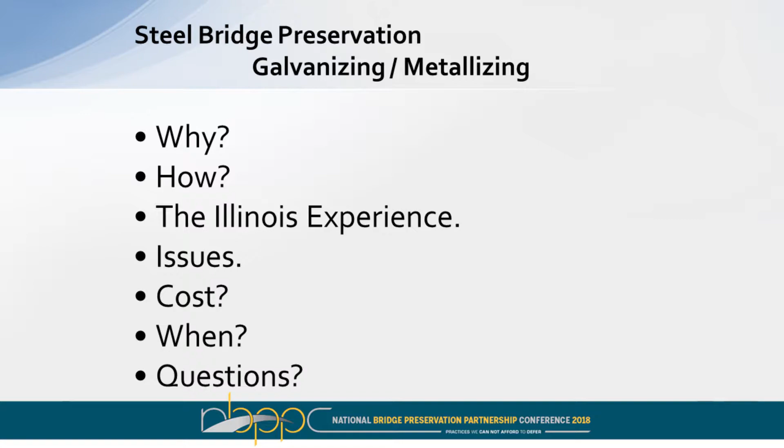We're going to talk about steel bridge preservation, which is near and dear to all of our hearts. A brief outline: why should we care about bridge preservation? I realize this is probably preaching to the choir, but we need to think about how to sell it, because when we want to do something different and spend a little more money, we need to sell it to people who don't see what we see. We need to think about how to preserve our steel bridges, what we've done in the past, and what we should do in the future. Ideally I'd like to move all our bridges to the Arizona desert, because it looks like paint lasts forever there, but that's not quite possible. We're going to talk about the Illinois experience, cover some issues, go over the costs, talk about when we should do this work and make this change, and then go over any questions you have.

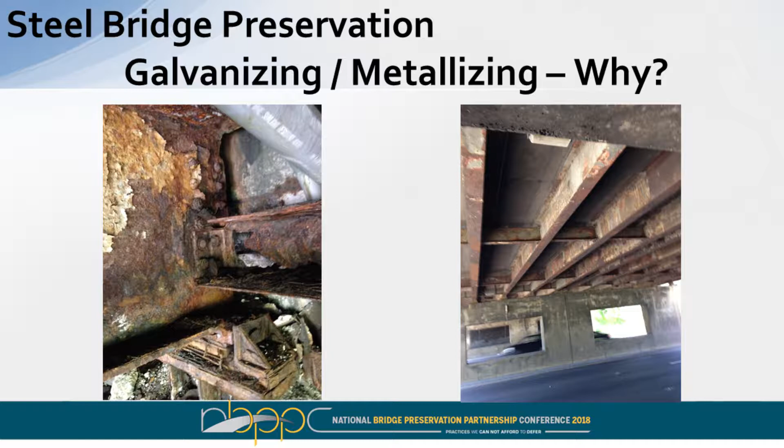I think these pictures are pretty evident. Why should we preserve steel? Why should we consider different steel preservation methods? Because what we're doing isn't working - either we're not spending enough money on painting, or we need something different, something more robust. Painting isn't doing it for us. We also have a huge inventory of steel bridges out there - 30% of the nation's bridges are steel, and I'd venture to say they're the longer bridges, so the deck area of steel bridges is huge.

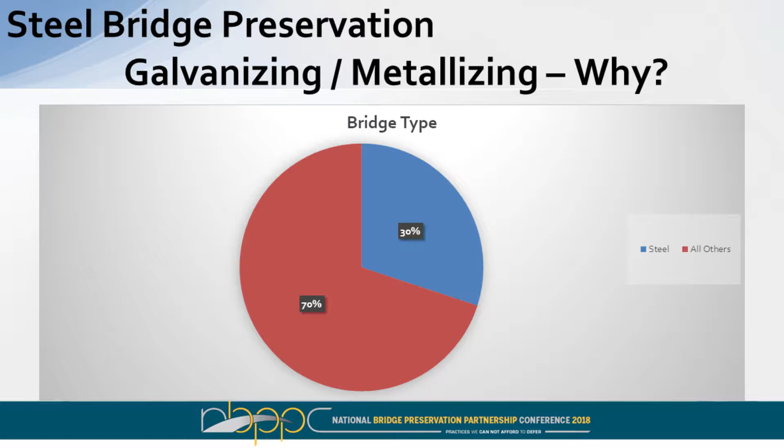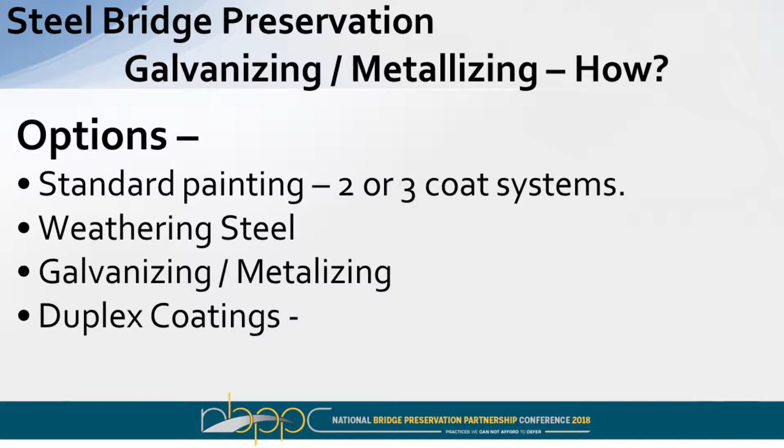So what are our options for preserving steel bridges? Our standard in Illinois has been painting - we'll do a 2 or 3 coat painting system and declare victory, but our victory doesn't last very long. Weathering steel is an option; it was sold to us as a good answer, but it hasn't always worked well everywhere, so we need to be careful where we use it. Another option we've used more in the last 10 to 15 years is galvanizing and metallizing, and there's even a possibility of duplex coatings in the future.

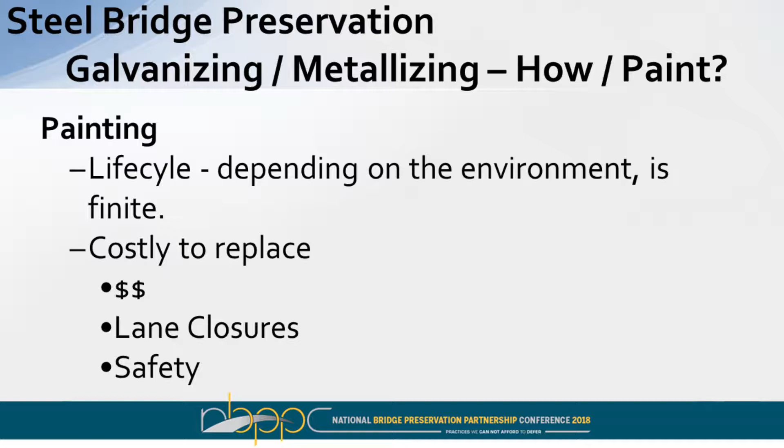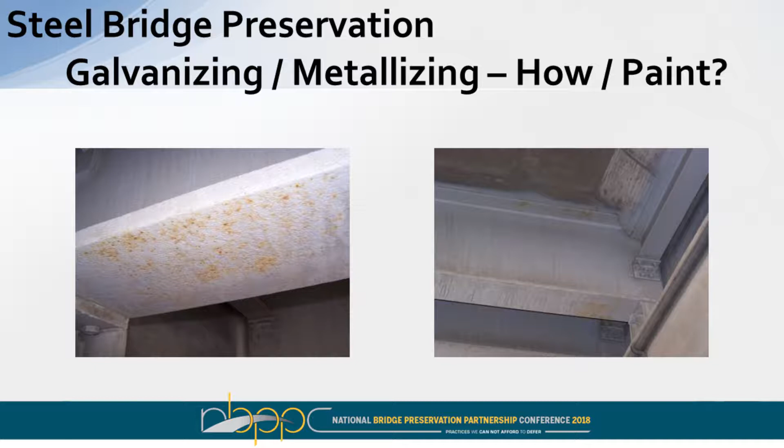Painting - what are some of our issues with it? It's really got a life cycle, and that life cycle is not the life cycle of the bridge. It's definitely finite and costly to replace. It's more costly than just the money up front - you've also got lane closures, traffic delays, and the safety of the workers who have to be out there replacing that painting. We've had painters die in Illinois, and I'm sure every other state has had the same experience. This is a redecking, and two years after we redecked it, we did a full blast clean and paint. Two years later, I've already got flash rusting showing up. Painting's not a permanent solution - you've got to keep coming back.

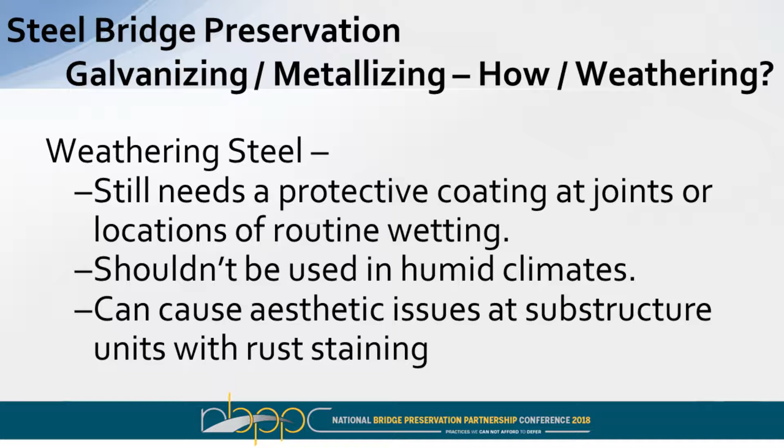Weathering steel provides a protective patina that's supposed to prevent future rusting, but it doesn't always work - you've got to be careful. It still needs a protective coating at bridge joints or locations like bridge drains that see routine wetting. It shouldn't be used in humid climates, and it can cause aesthetic issues. Personally, I think it looks kind of neat with the rust bleeding down the piers, but not everyone agrees with my particular tastes.

One of the options we've looked at is hot dip galvanizing. It's not a paint coating it's a zinc coating, it's actually a coating formed differently. So we're going to have Tim talk about hot dip galvanizing and metallizing.

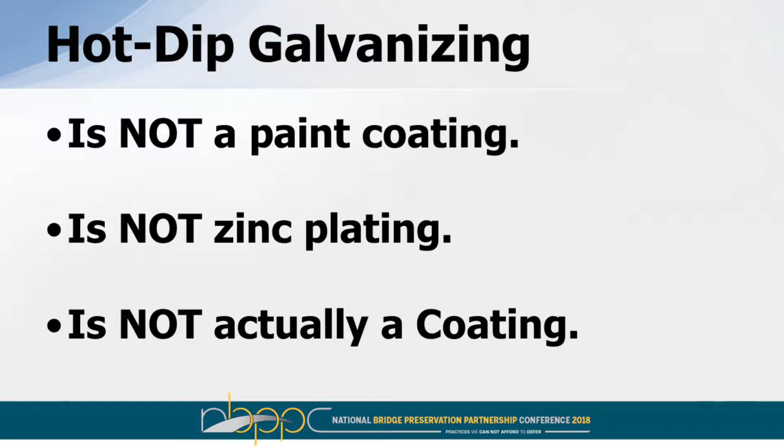Thanks, Sarah. So when we talk about hot dip galvanizing, it's not paint, it's not plating - technically it really is not a coating, we're actually forming a new alloy. So how does that work? It's a thermo-zinc chemical diffusion reaction that happens between molten zinc and steel. For lack of a better term, we're actually melting the two metals together to create a new alloy that's going to protect the steel for a longer period of time. So how does that happen? Well, galvanizing is a factory-controlled process done on a repeatable basis, and you really can't fake it if you get to the end of the line and it hasn't worked.

We know it pretty quickly and have to send it back through if that does happen. But how does that happen? Well, this is the process in a typical hot dip galvanizing plant.

We have a degreasing system that happens initially where the steel is dipped just to remove grime, dirt, cutting fluids, things of that nature that have happened in production or shipping to the galvanizing facility. We then rinse that, and it then goes into a pickling process. This can be either a hydrochloric acid solution or a sulfuric acid solution. It's about 50-50 in the United States, and it's basically the preference of the galvanizer.

Sulfuric lets you go a little bit quicker, but it's more aggressive, so you've got to be careful and have a good operator. Hydrochloric, while it doesn't go as fast, you can leave it in there all weekend and it will not attack the base steel or the welds. So those are the differences of the two, but they're both very effective in cleaning the steel down to a white metal. If you read a paint spec, it says blast to a near white finish. To galvanize, we need to have a white finish.

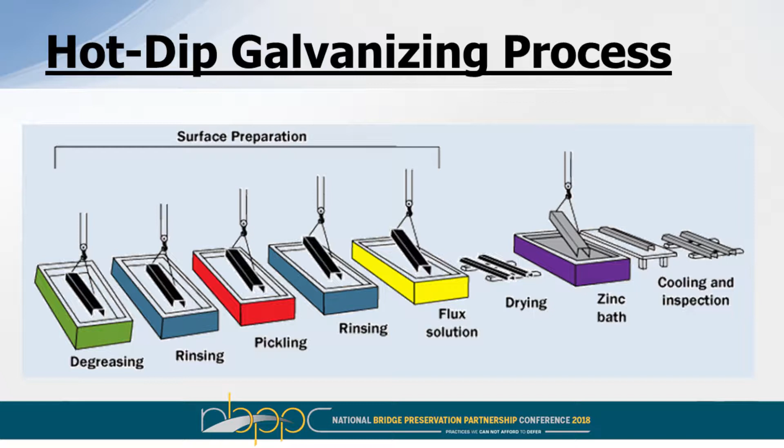It then goes into the bath where it is dipped and reaches 830 degrees - I'll explain more of the specifics in a second. It reaches the temperature, it's galvanized, it comes out, and has to cool to the touch. Sometimes galvanizers will quench or passivate the steel; otherwise we just let it air cool. Then it's inspected, cleaned, and ready for shipment. Basically, it's got to be cool enough so you can put it on a truck so it doesn't burn the truck deck. This is a typical galvanizing plant.

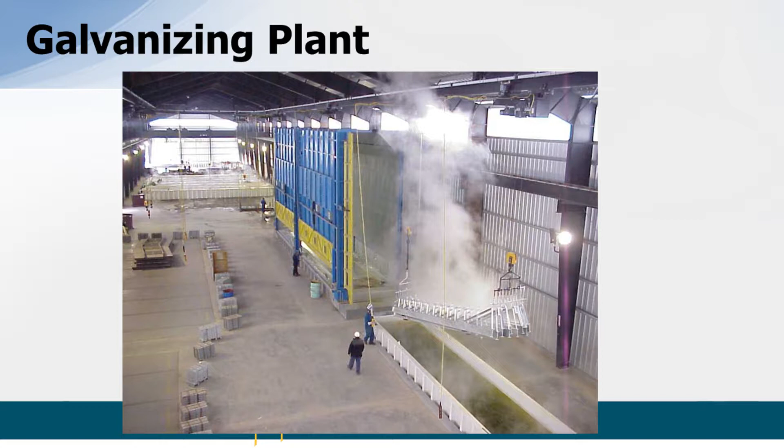Down at this end is the pre-treatment line. This particular plant is not an inline plant, so the steel is then moved. That shroud area there, the blue and gold area, is the kettle. That's a cover around the kettle, so in case the steel was not dry going in, it protects the workers as the steel is dipped. Then it's moved out, and this tank it's just about to go into after coming out is the quench tank or the passivation tank in this particular plant, but that can be skipped if you don't want to do that step.

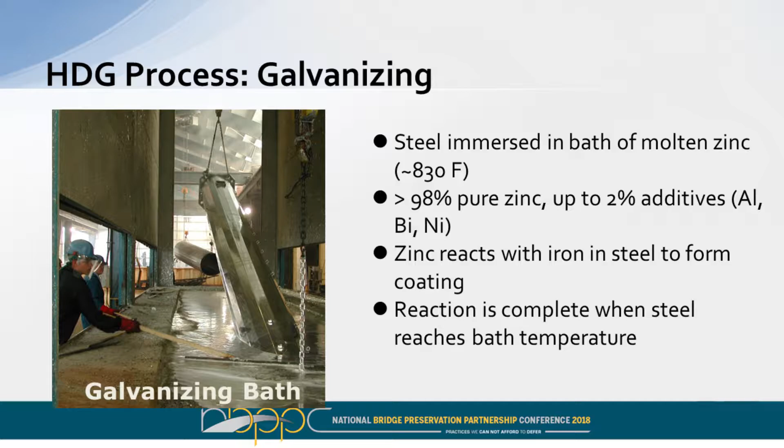So in the hot dip galvanizing process, the steel is immersed in a bath and gets up to 830 degrees - that's where the galvanizing process happens. It's 98% pure zinc in order to meet the ASTM A123 spec, with about 2% additives of aluminum, a little bit of bismuth, and a little bit of nickel. It reacts with the iron to form the coatings, which I'm going to show you in a second. The reaction is complete when it reaches that 830 degrees.

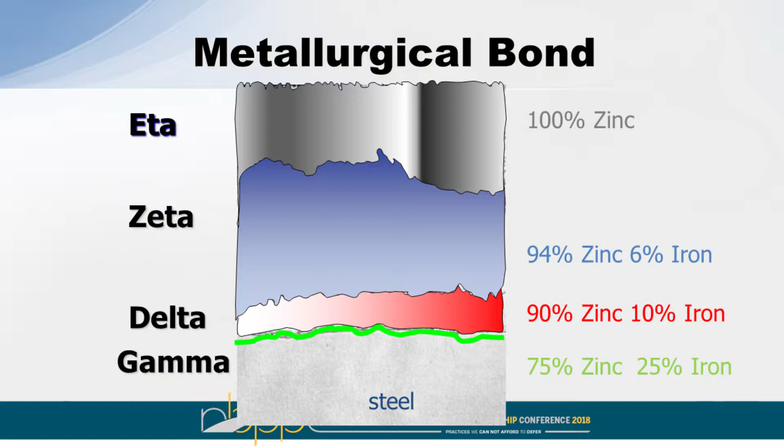When the steel is coming in, this is the metallurgical bond that is formed. You have your base steel down here. You have your gamma layer coming in at 75% zinc and 25% iron. The delta then comes in at the next level, 90% zinc, 10% iron. The zeta, as you can see, builds out even larger here at 94% zinc to 6% iron. And then your eta layer, which is your free zinc layer, the 100% zinc layer.

This is where you're going to see that white powder on, let's say, a guardrail that's out on the highway or that type of thing. That is not a bad thing - that is not white rust. White rust is actually black, which doesn't make any sense to me, but that's the case. So when you see that white powder, that just means the eta layer is starting to work to protect the patina, to protect the base steel.

Unless you see it spark, you have not hit the base steel. Zinc doesn't spark, so that's something to keep in mind when you're on a job site. If they hit it with a grinder and it doesn't spark, they have not hit the base metal, and so it does not even need to be repaired at that point.

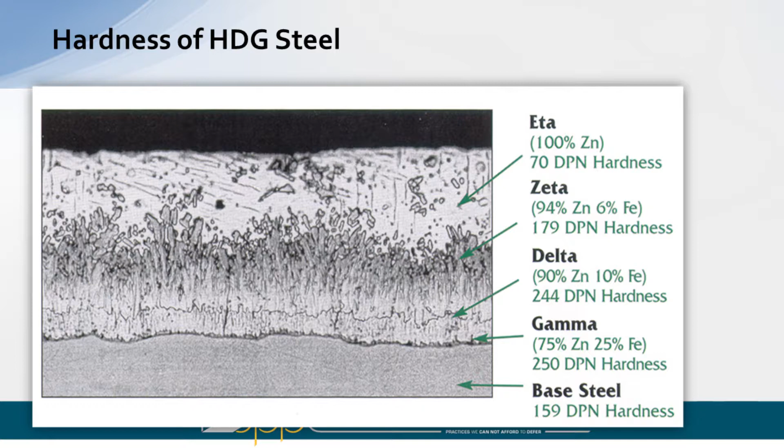Your eta layer is very soft. That's the layer that is really going to do that initial protection on the steel. It's going to oxidize quickly, but then it slows down as it starts to reach into your lower layers.

The metallizing or thermal spray is another method of getting the zinc onto it for larger beams that maybe aren't able to fit in the kettle for galvanizing. It's just a positive and a negative wire coming through. It's then sprayed out with clean air and applied in a heat environment to blast. Basically, you're blasting it into the steel, and it's kind of similar to a welding procedure.

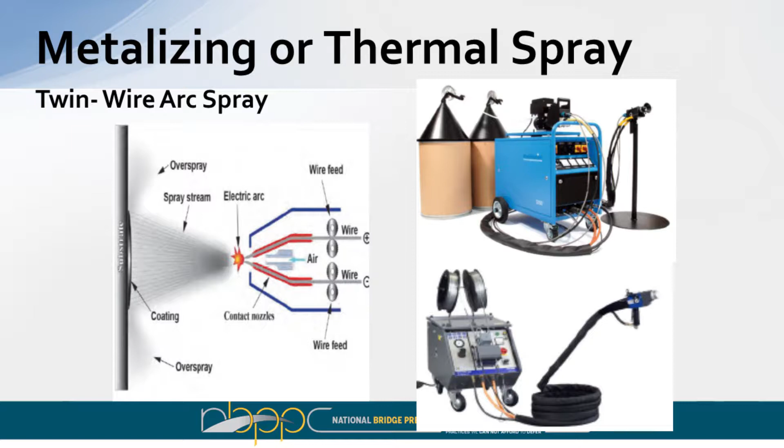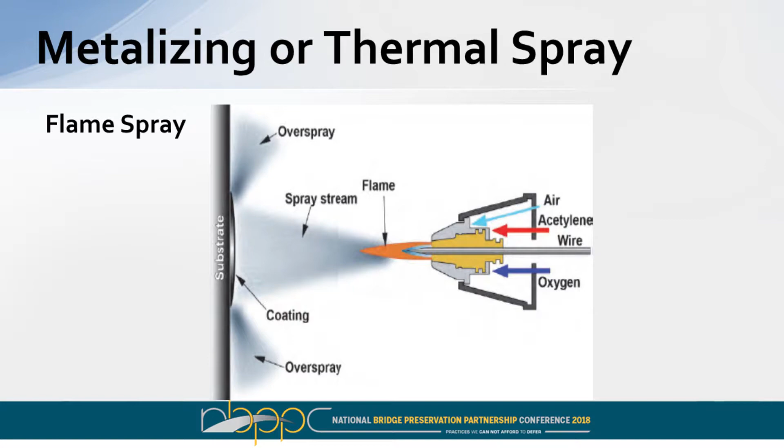Then we have flame spray, which does a similar thing with your wire coming out, but you have acetylene and oxygen, and it will blast it onto the surface as well. Again, it's great for repairs, but also for large members. This is an approved repair under A780, and the spec for galvanizing is the thermal or metallizing spray.

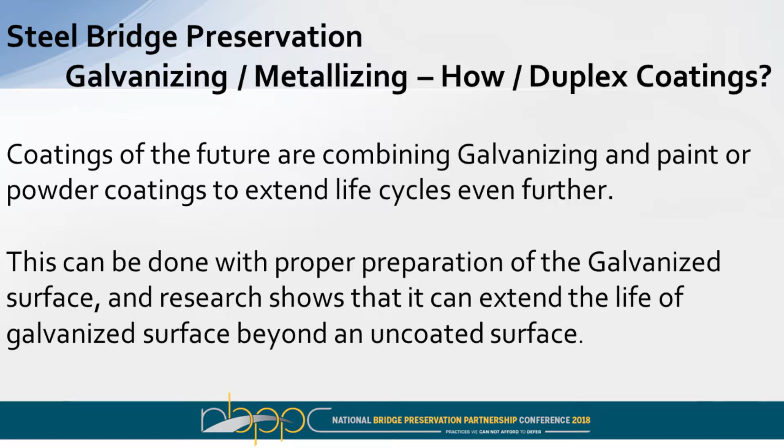I'm certainly not an expert on duplex coatings, but it seems like if you want to do belt and suspenders, you can do the galvanizing or metallizing and then paint it as well, and you get a synergy between the two systems. The paint has to deteriorate before the galvanizing or metallizing will even begin deteriorating.

So if your galvanizing is going to give, and your paint's got a 20-year life, well, you're 20 years in before the galvanizing is even exposed.

It also could be used if you're concerned a bit about the areas more prone to appearance issues. We've heard that metallizing, and I've seen it, has a splotchier appearance. It's not as aesthetically nice. I really think it fades pretty quickly in the first few years.

But if you're worried about that, you could put a coating over the galvanizing, so it's an option for the future. They're talking that maybe you could get a 100-year life out of a duplex coating. We haven't tried it yet, but maybe it's something we want to consider with a 100-year life cycle of a bridge.

So I wanted to talk about the Illinois experience and what our challenges are with steel bridge preservation, because the bottom line is I want to preserve the steel. Our problems in Illinois are we're the Rust Belt.

We have climate problems, and because of our freeze-thaw cycle, we decided we're going to spread salt everywhere, and we're going to spread it a lot. When you talk about the high-speed expressways, you're going to spread a lot of salt, from the first drop or first flake of snow to the last flake of snow.

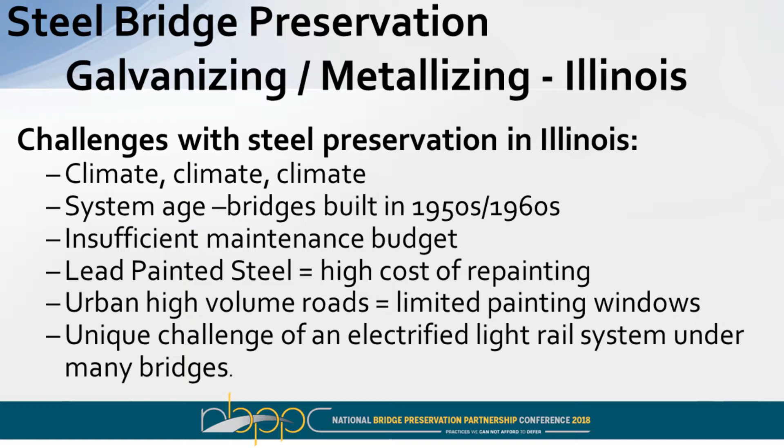So it's very costly to paint in the urban area. And then I've got an even higher challenge. If you've ever taken the mass transit in Chicago, the elevated system with the electrified rail travels alongside many expressways, and many overpasses cross right over that electrified rail. That rail runs about 20 hours a day, and the time frame between trains is about 10 minutes. Guess how much time I get to paint?

Not very much. So those are our challenges in preserving our steel. We wanted to find something that would work - a method to protect the steel that didn't require us to go back every 15, 20, 25 years to recoat it. So we looked at galvanizing some of the bridge replacements, some of the new rolled girders, because they fit well into the baths. We did have to make some design changes to accommodate the baths - they were only a certain length, so we had to make sure the lengths of our beams and where the splices were going to work with the bath lengths. There's some planning you need to do ahead of time.

And then as we looked at some of our larger plate girders, again we were outside the limits of what could fit in a bath. So there we turned to metallizing, which we saw as not quite as good as hot dip galvanizing, but certainly better than painting.

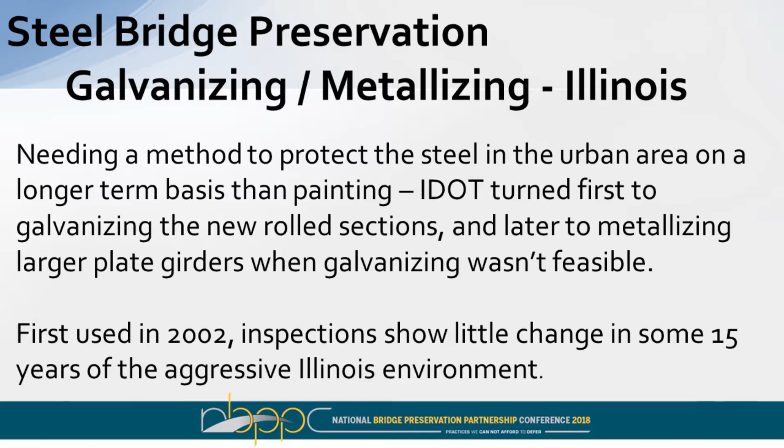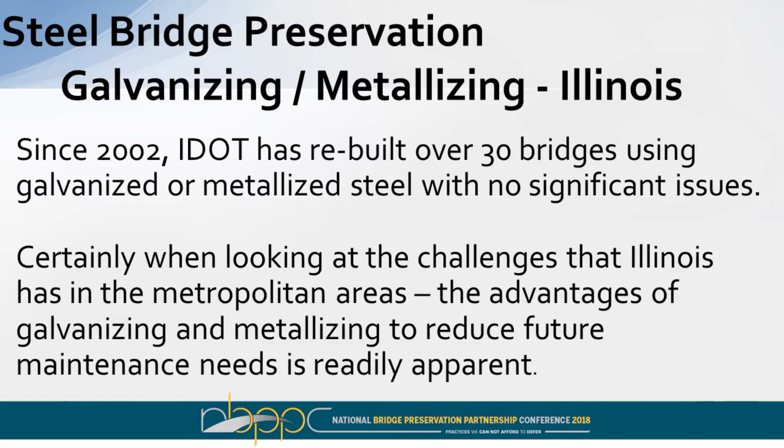Our first use of galvanized beams was in 2002, and inspections 15 years later really haven't shown much change. Since 2002, we've rebuilt over 30 bridges using galvanized or metallized steel, with no significant issues. Looking at the challenges Illinois has, the advantages of galvanizing and metallizing are readily apparent. I'm speaking to the choir, but someday you have to speak to the people that don't see it, and explain it.

This is the bridge. It was done in 2002, so it's been out there 15 years and we really don't see any problems with it. Again, love all the utilities under the bridge, so that complicates any work.

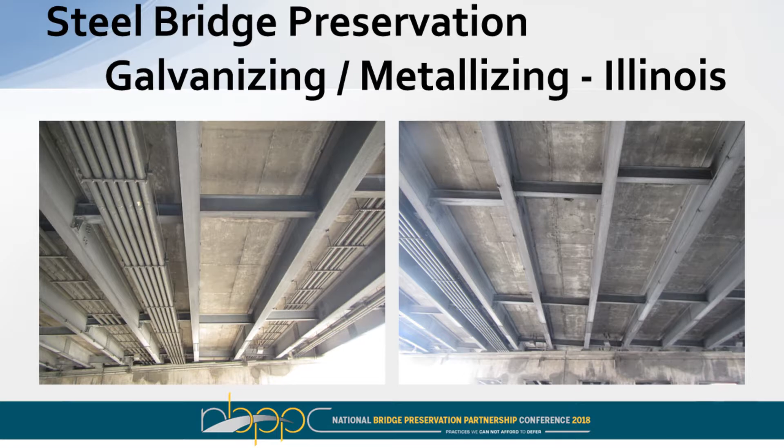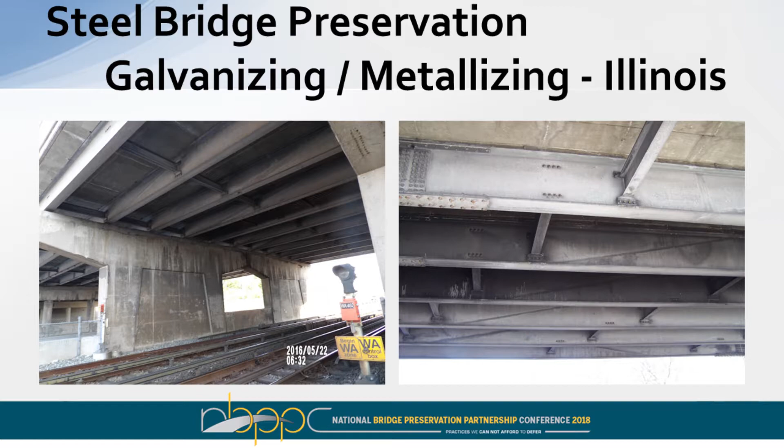This is another bridge that was done. It shows the electrified rail, and it does show one of the issues we run into - an aesthetic issue, which doesn't bother me because I'm a bridge engineer. I'm not there to make things pretty, I want to make them last. But you can see the dip line on the girder.

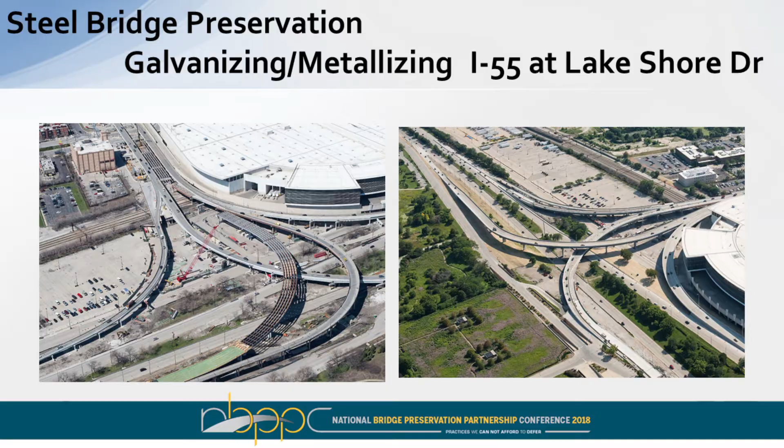So here's one of our largest projects to date where we've used metallized and galvanized beams - this is I-55 at Lake Shore Drive. We replaced 6 bridges, just completed last year. Almost 15 million pounds of steel we went with galvanizing and metallizing. We did not want to face the costs of repainting in the future.

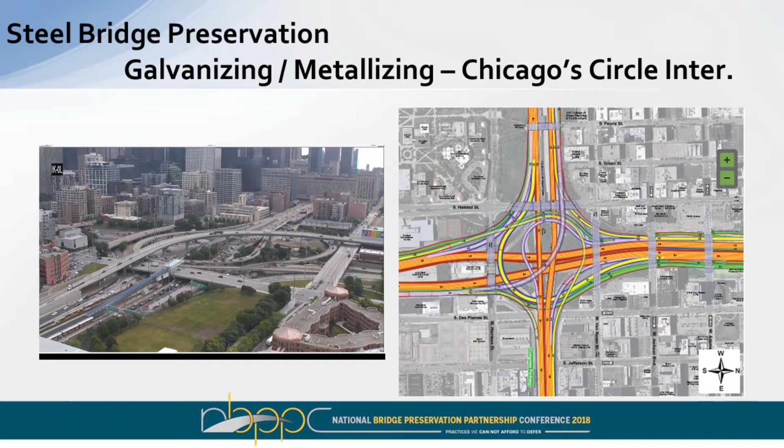And here's one that's currently ongoing. Illinois is working on replacing the Circle Interchange, now the Jane Byrne Interchange, in the heart of the loop of Chicago. 18 bridges are being replaced, and where the girders are small enough we're hot dip galvanizing, and where they're large we're doing the metallizing process. So Illinois is making a serious investment in the process.

I actually hope we can bring it beyond the limits of the urban environment, because when you look at life cycle at all, it becomes readily apparent that if you've got a process that will last 50 to 75 years versus another process that takes 25 years, it's far better.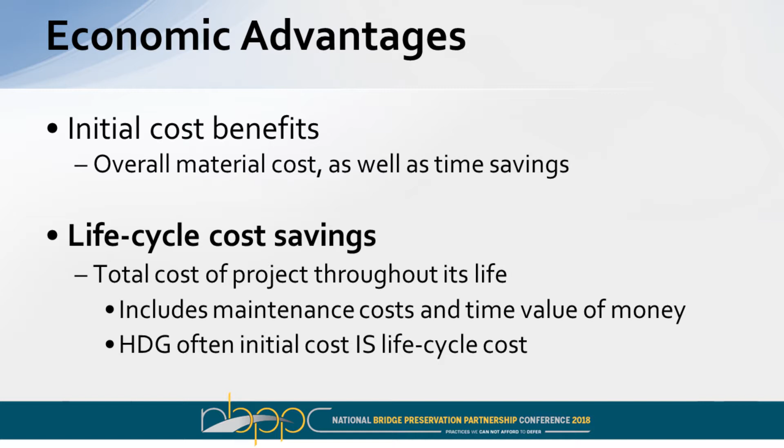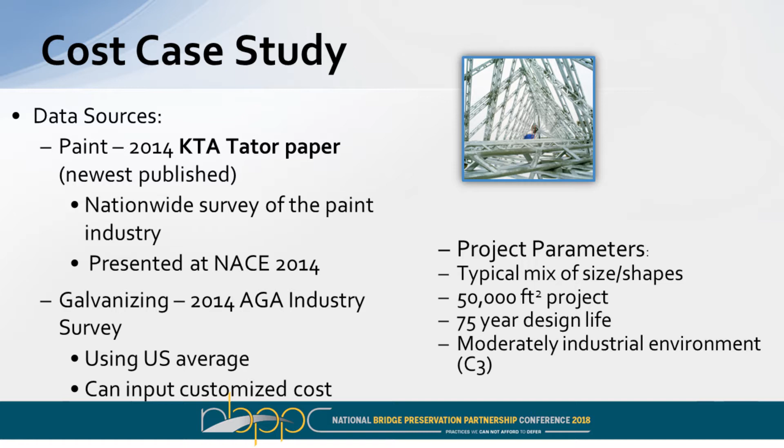This was done by a KTA Tator paper that was presented at the NACE conference, at the paint show in 2014. Galvanizing used the AGA's information as far as U.S. average cost, but this was the project - a 50,000 square foot project. They were looking for a 75-year design life in a moderately industrial environment. They looked at a couple of systems for painting, but then galvanizing is full inclusive pricing, and these were the numbers that came up: an initial cost of $1.76 a square foot for an $88,000 investment.

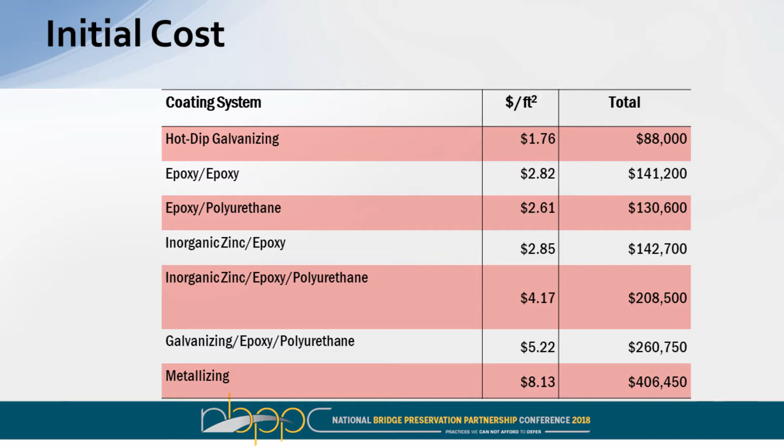These were the paint costs down to the metallizing costs, where metallizing is great but expensive. You can see the difference in the total initial cost.

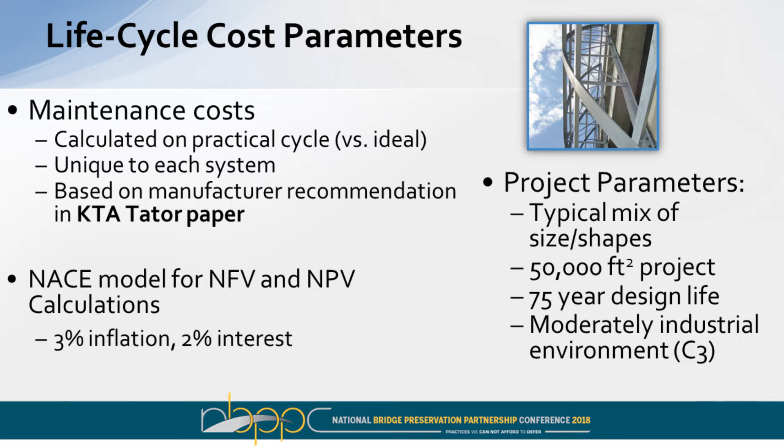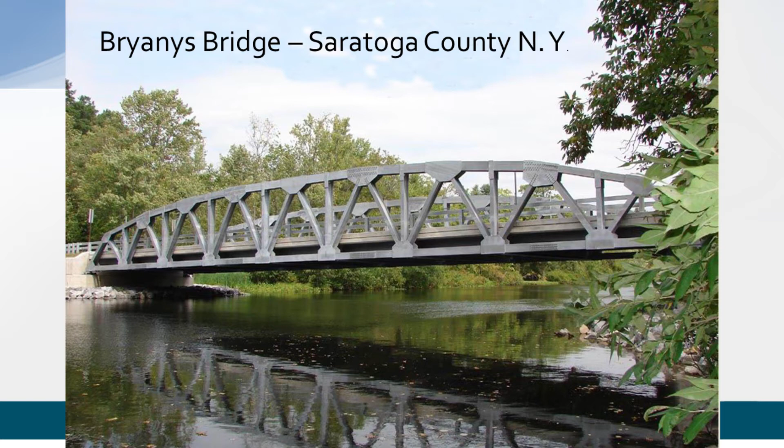I'm going to move quickly here to a couple of bridges. This is a truss bridge in New York over a stream. This is a really neat project in Illinois, a floodplain, and you can see this has been up for almost 50 years. You can tell the water has come above the ledge because of all the debris on there.

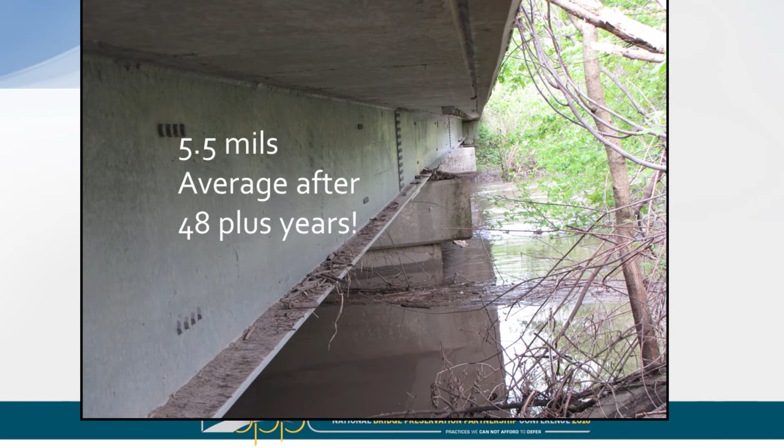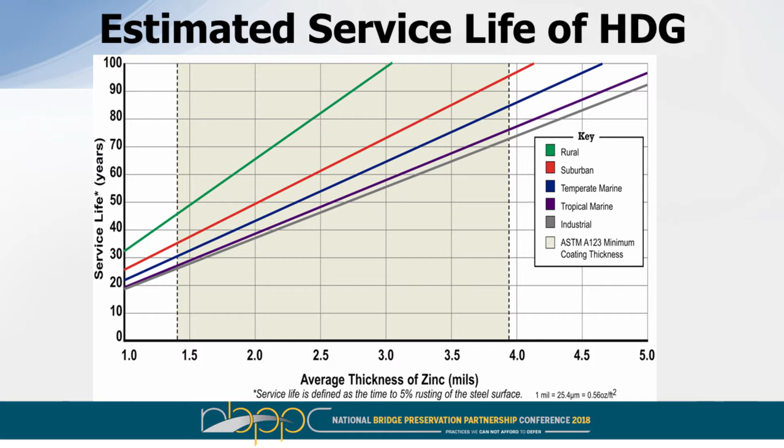But the galvanizing still has 5.5 mils. The minimum thickness you have to have on a beam this size, a quarter inch thick, is 3.9 mils when it goes into service. So even after 50 years, it still has 5 mils. The life cycle at 70 years in a heavy industrial environment for 3.9 mils of zinc.

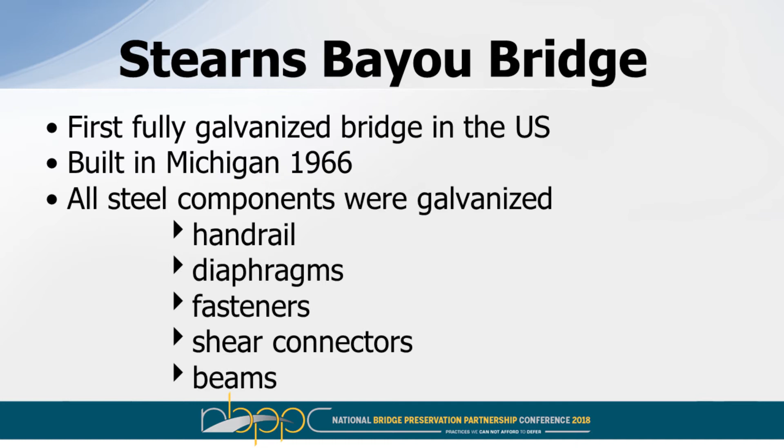The Stearns Bayou Bridge in Michigan was the first fully galvanized bridge in the United States, in 1966. That's just me taking a picture, proving that was done in 1966. The beams here have some gusset plates. This is actually a tube that's cut in half as a joining member underneath the bridge.

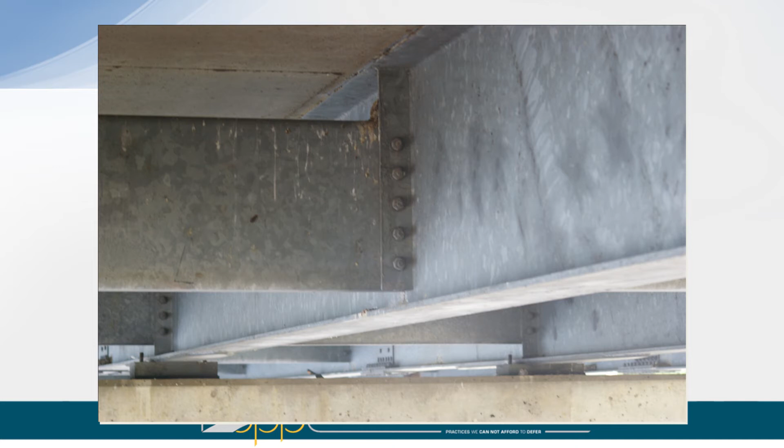This is the northwest side of the bridge, so it hits a lot of weather off Lake Michigan. The beams, to this day, we tested these two years ago at the 50-year anniversary, still have 5.6 mils on the beams on the most exposed side.

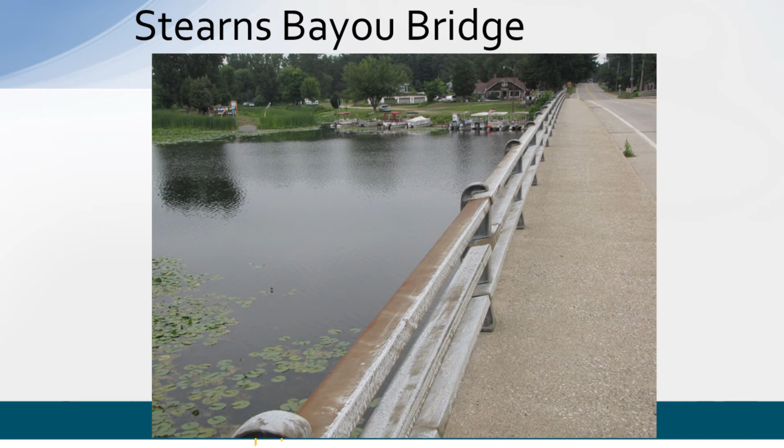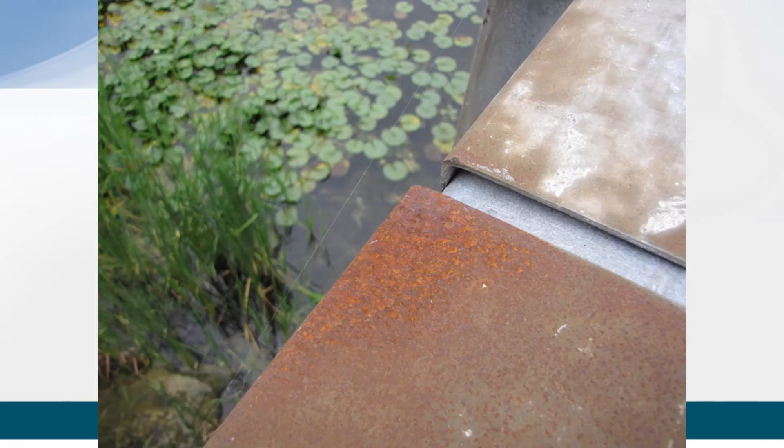But this is the railing that gets hit with a lot of salt and snow from the plows. Still, even though it looks like there's no galvanizing left, there's still 2.4 mils because you're into those iron alloys I talked about earlier. This is a perfect system right now to go ahead and paint these railings to keep them in service. There are about 4 areas on the bridge with little tiny spots that need a bit more attention, but it really can do it.

One more real quick example: in 1970, this bridge was built in Indiana with galvanizing on one side and painted on the other. It has been redone. It was repainted in 1984, the painted side was.

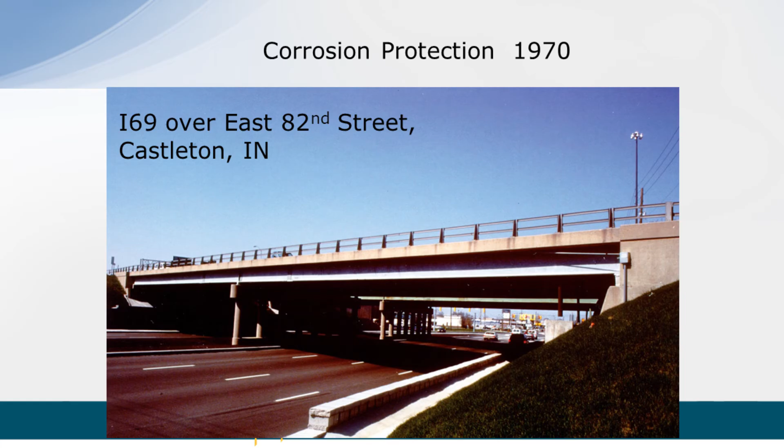And then in the early 2000s, the painted side had to be metallized and then painted. So you can see the amount of maintenance that's had to be done on the painted side, while the galvanized side has had no maintenance since 1970 and is still doing fine.

So if you have any questions now, we'd be happy to answer them.

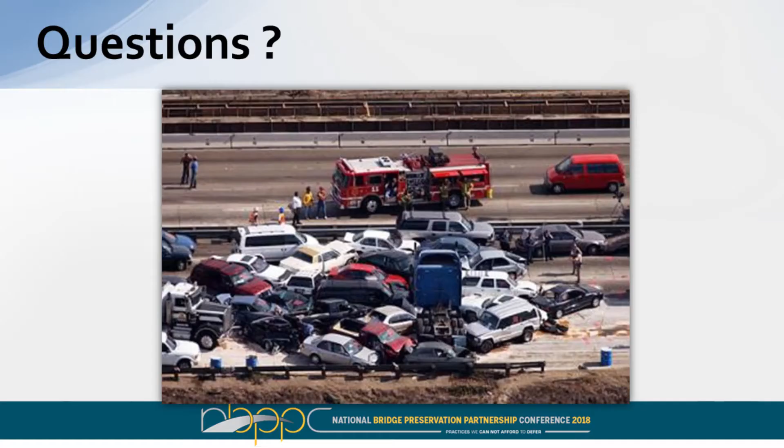I don't know why Kevin put this slide in, but he did. I'm the chair of the National Bridge Preservation Partnership's Coatings Group. We pushed through a research project that wasn't easy, where we got recommended to be funded for duplex coatings, and hopefully by SCOR it's going to go through. But I think you're right on the mark. I do think, though, that with the paint system, we should be trying to work on a high-performance paint system to gain as much life out of that. But I think you're headed in a great direction there.

In Florida, we already have probably 5 bridges where we've used this technology, and we're seeing exactly the same results, absolutely no damage on it. We also completed in-house research recently, and we're publishing at this year's NACE conference on metallic coatings on structural steel. We're getting very good results. However, I want to point out that in our study, the metallizing actually did much better than the galvanizing. Oh, that's interesting, I'm glad to hear that.

We're going to be publishing the results next week. One of the differences is the amount of zinc you can deposit on the steel. With metallizing, you get a larger millage. The other thing is, for anyone interested, NSBA, the National Steel Bridge Alliance, just published a specification for metallizing on structural steel. Just passing that along as a piece of information.